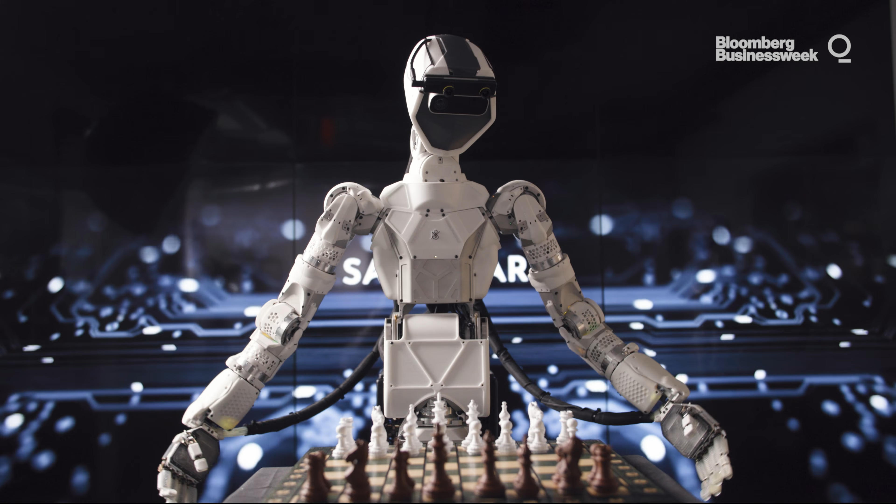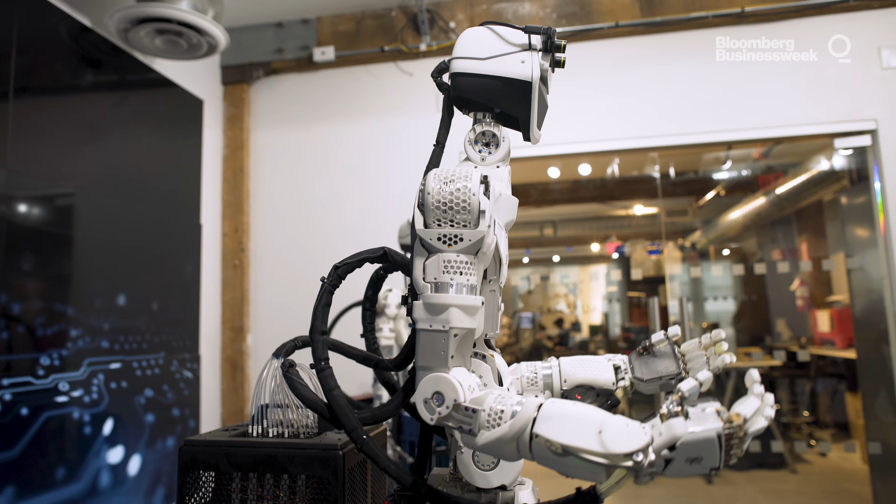But today, I will visit a startup called Sanctuary AI. They've built this crazy robot that has artificial intelligence baked into it, and it also has these very lifelike hands. Sanctuary claims to have the smartest, most capable android on the planet. The only thing we can say for certain is that because the robot is being built in Canada, it will be ridiculously polite. I'm sorry. Excuse me. My bad.

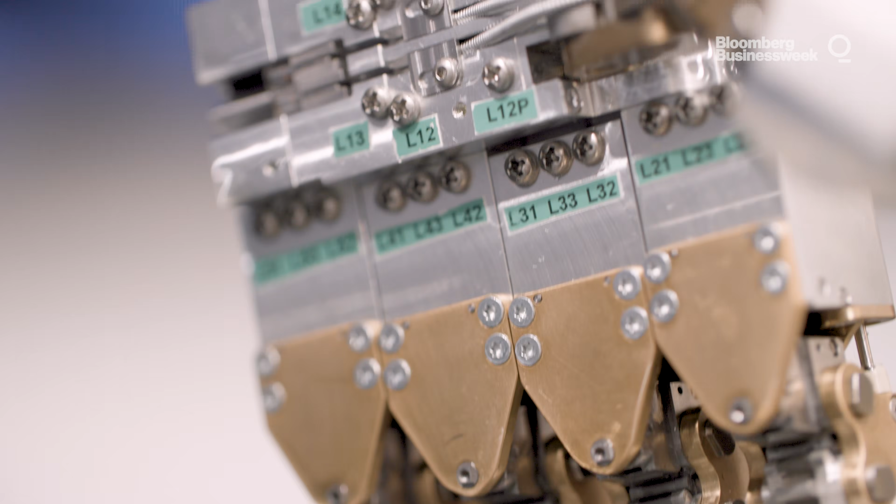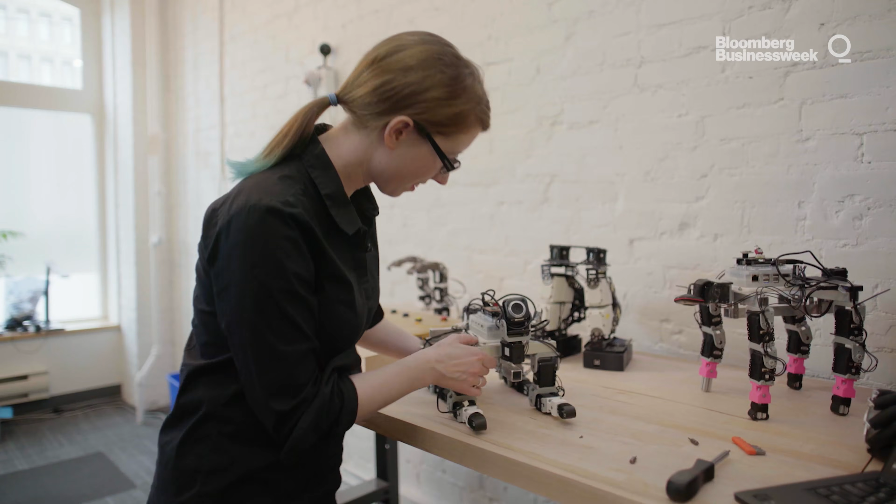Sanctuary AI was started by a handful of engineers in 2018. The company's CEO is this fella, and its chief technology officer is Suzanne Gildert. If Suzanne looks familiar to some of you, that's because she's been on Hello World before. Her previous company was called Kindred, and it made robotic arms that could pick and place items in factories. Suzanne's new company is a lot like her old company, only better.

Do you want to shake hands? Yeah, absolutely. Nice to meet you. Nice to meet you.

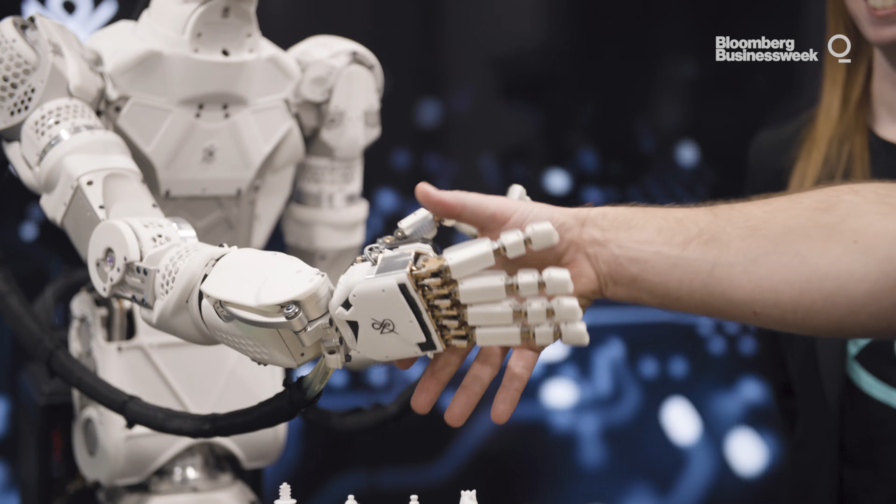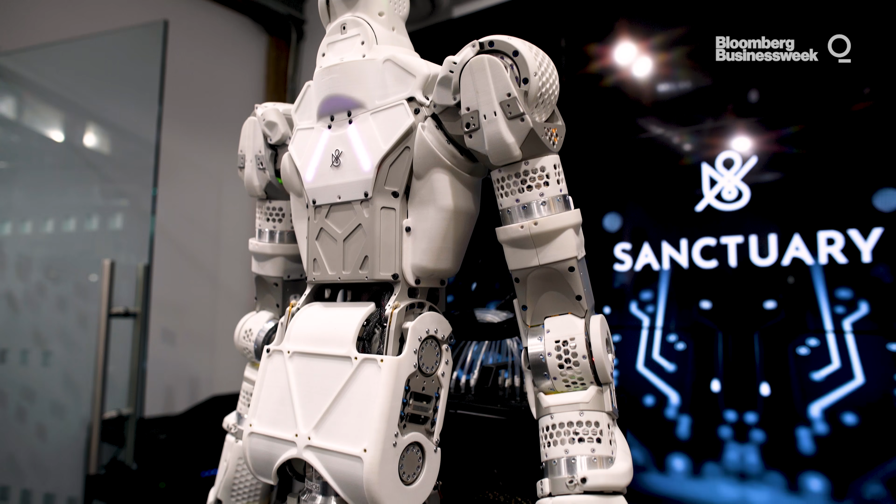So this is our general purpose robot. It's a humanoid in form and function. It's designed to be good at doing work tasks. Do I call it an it? What should we, how do we refer? I usually refer to the robot as it. Eric is our pilot, who you'll see taking control of the robot. He will be our operator today. Hi, Eric. Hey.

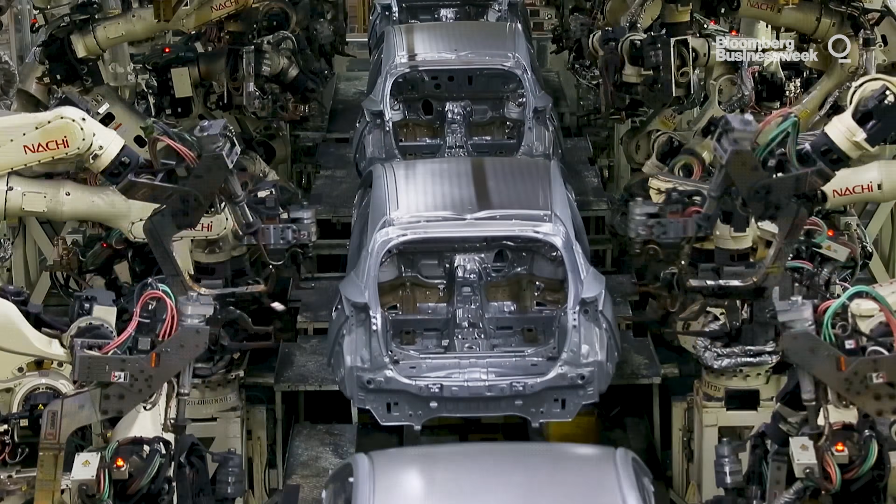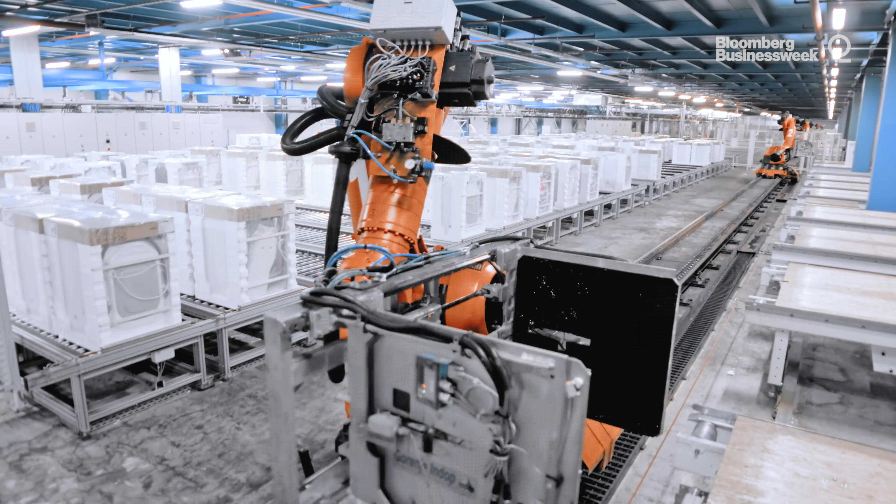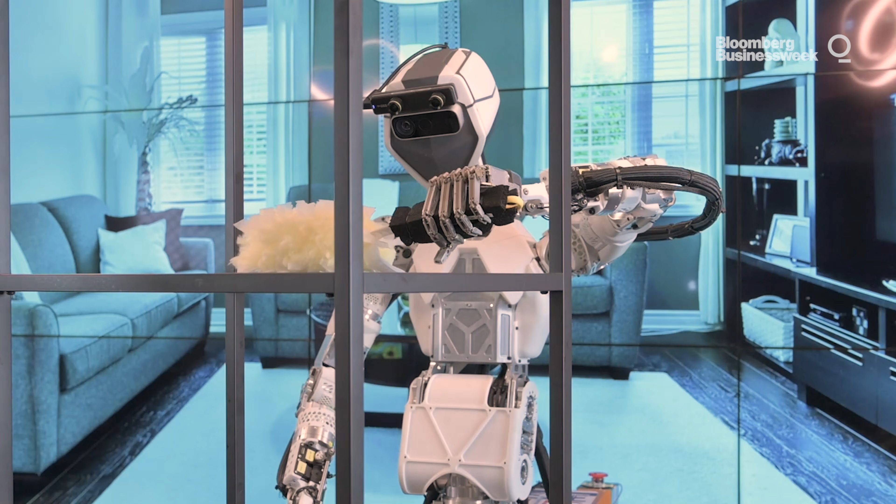I think people have seen robots at a car factory, but walk us through some of the advances you guys have made versus that type of machine. Most robots that you'll find in industry are special purpose, and they're programmed in a very different way. They're programmed to do a repetitive task over and over again, so that robot doesn't really know where things are. It's just executing some pre-written routines. So what we're trying to do here is build a robot that is actually aware of its surroundings. It's building up a mental model of everything it's seeing in real time, and is therefore able to do more general purpose tasks.

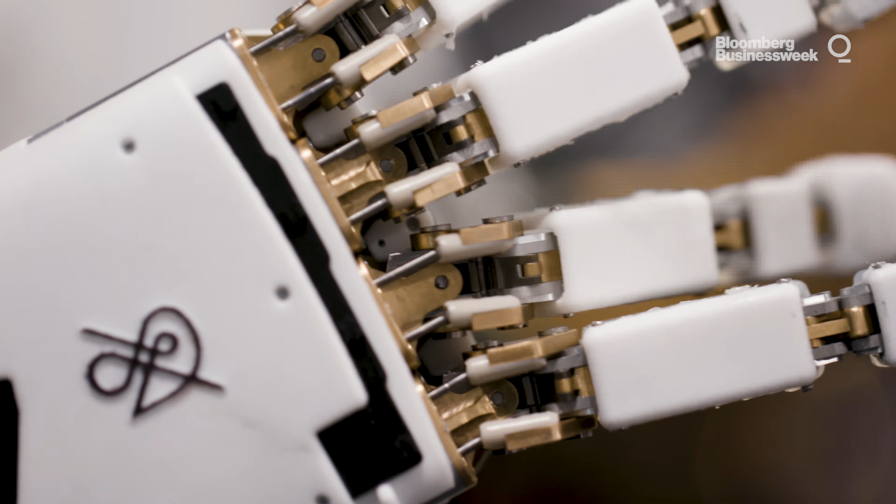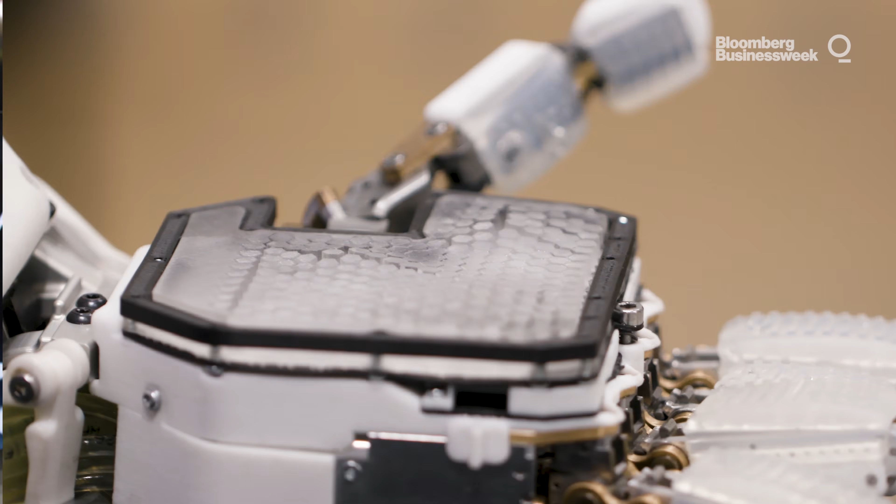A big part of that would be the dexterity of the hands. I know you guys have been focusing on that for quite some time. Yeah, these are about the 4th generation hands that we built. So maybe Eric, you can hold out your hand. I can show some of the features. So obviously a human-like hand, 4 fingers and a thumb. These things you see here are sensors. That gives the robot a haptic sense of touch.

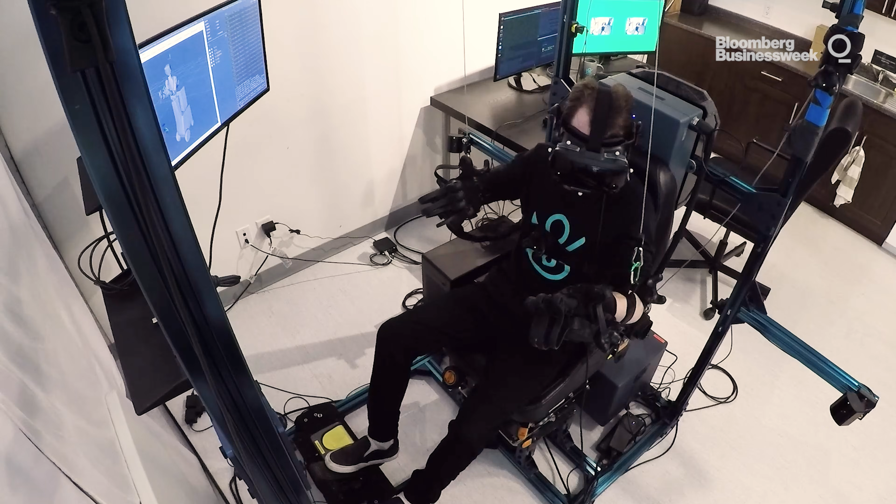When these pressure sensors are pressed, the data signals go into the software system, and they're also relayed to the pilot. So Eric has like a glove on, and he can feel that when you poked. Yeah. Why don't we play a game of chess and we can talk through some of the components while we do that?

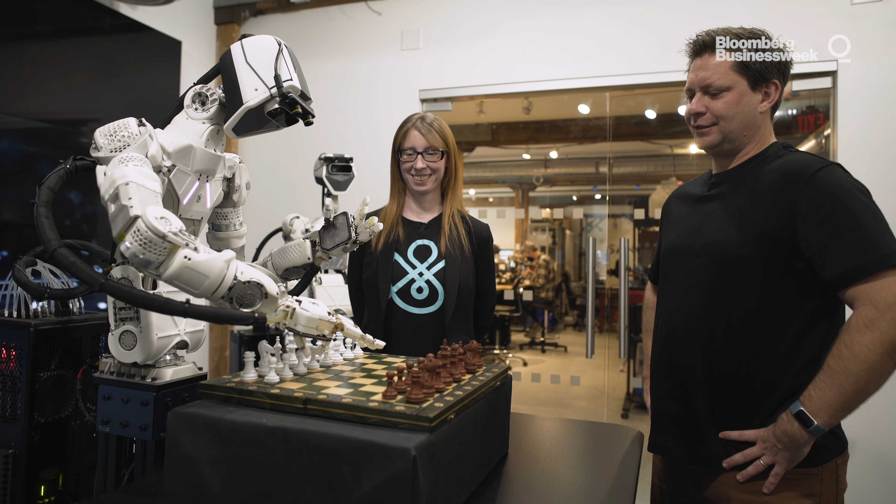All right, so you're white. You go first, right? Yeah, sounds good. Should have pre-planned my move. I will be using the Sicilian defense. I'll let you know. Oh, seems I might be outmatched.

Eric, when you're doing this, are you just seeing the piece like I am, or is there some sort of guide? Do you have a helmet on? Yes, I do. I have a VR headset, so what I'm seeing is stereo vision through the camera you're looking at. Yeah, you can almost see behind you, right? Yeah. Oh, I didn't even see the camera over here.

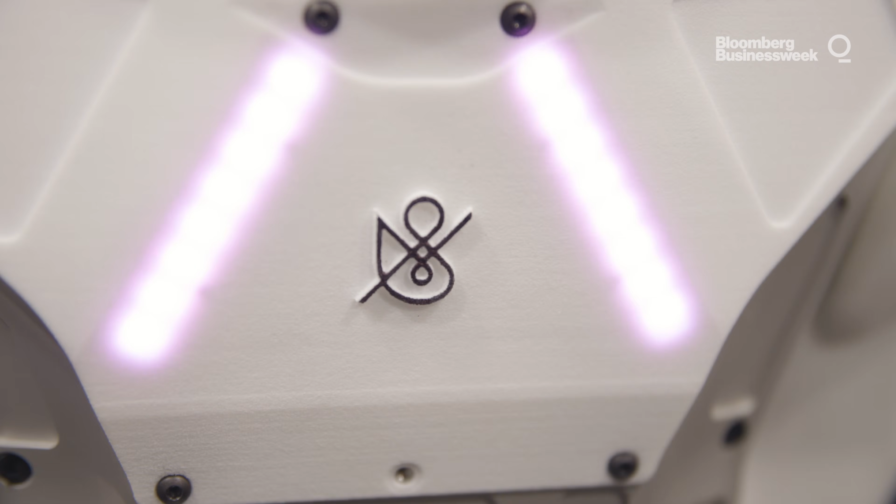I think that probably if people saw this for the first time and then they hear that there's a human operator behind it, they would kind of be like, oh, well, that's not what I wanted, the full robot. So a lot of people ask, well, isn't this just a person behind the scenes?

But having a person behind the scenes allows us to gather lots of very human-like training data to train the software system, train the AI algorithms to be more human-like over time.

So we're currently just using VR rigs, off-the-shelf gear, but we're planning on having some new rigs made that actually give force feedback to the pilot as well. So Eric, if you hold your arm out, the pilot would actually be able to feel the force feedback as well.

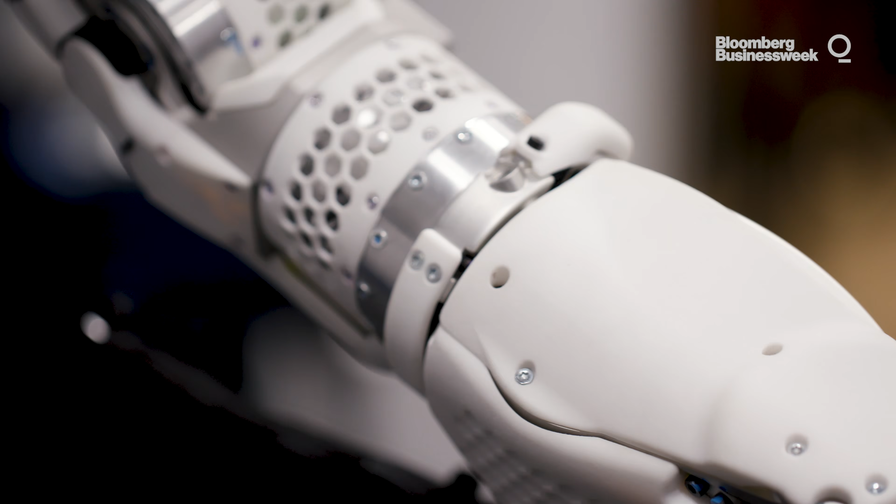These robots are designed to work alongside people, so we need them to be very safe. One of the things about this robot and its motor system is it actually operates in a force-controlled mode. So what that means is the robot will try and hold at the position of the arm, but if a maximum force is applied that is greater than a certain force, it will give.

Tell me a little bit about your background, just because I know you've been into electronics and computing since you were a kid, right? Well, I've loved electronics and robotics and things like that since I was little. I did a degree in physics and a PhD in physics and electronics too. And then from there, I worked in the quantum computing space for a while and eventually found my way into AI.

I know, outside of this, you have all these interesting tech-related pursuits. Yeah, so I have quite a lot of interesting hobbies that I do. I do like to do paintings. They've kind of moved towards a more tech electronics theme, and they're actually inspired a lot by computer history. So a lot of the paintings you'll see are things like close-ups of old microprocessors. There are even a few that are like robot power circuits. So always thinking about robots.

Whose move is it, Eric? I believe it's your turn. I'm not going to lose to an AI. Team human. Okay, I'm okay with that strategy.

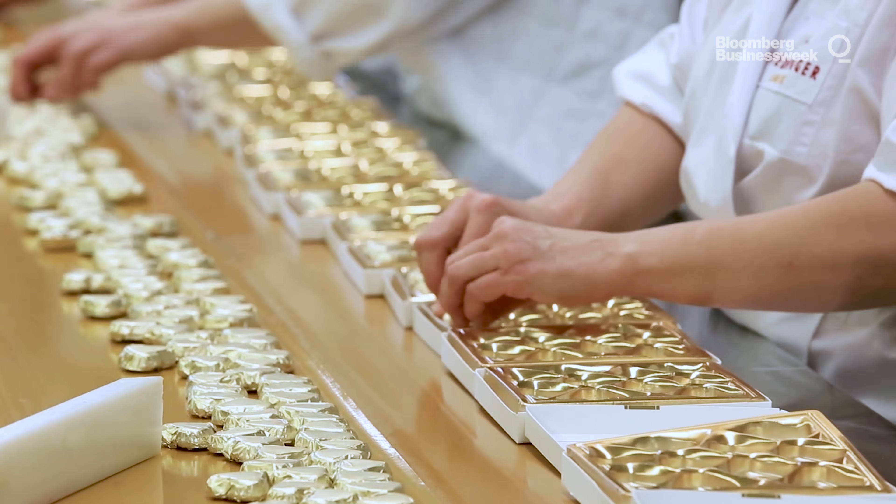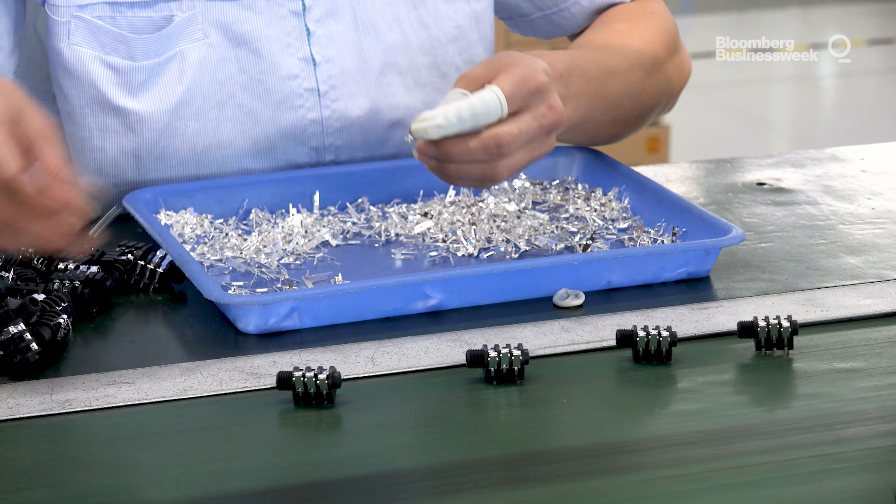But also chess is a stand-in for all different kinds of activities that you might have to do in the world of work. Maybe things need organizing in the right locations. You need to take stock of items in a retail store. Or you could imagine instead of chess pieces, these were small parts on an assembly or a sortation line.

The goal is eventually the robot is just smart enough that it's just doing its own thing with no human operator in some jobs? Yeah, for certain tasks. So I'd like to see this robot system be able to automate the really mundane, boring parts out of the...

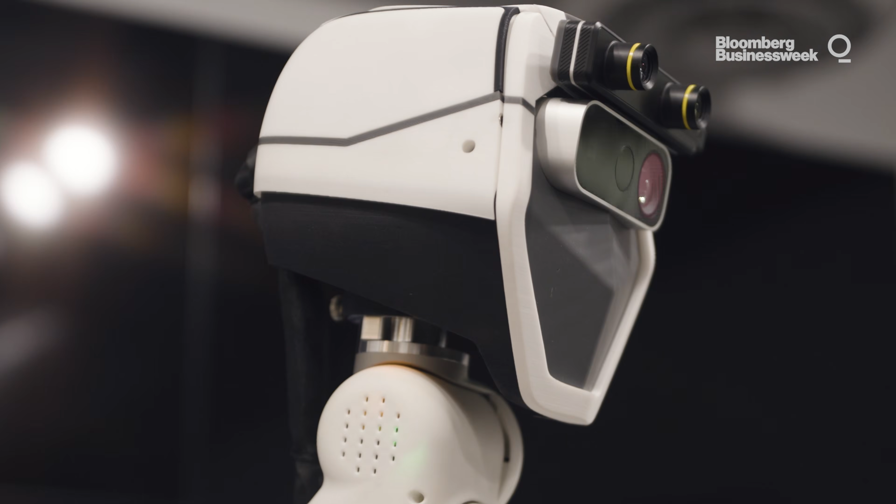Sorry, I gotta readjust something. I would appreciate if you gave me a minute or two. I'll just let him adjust that and move out of the way of its arm.

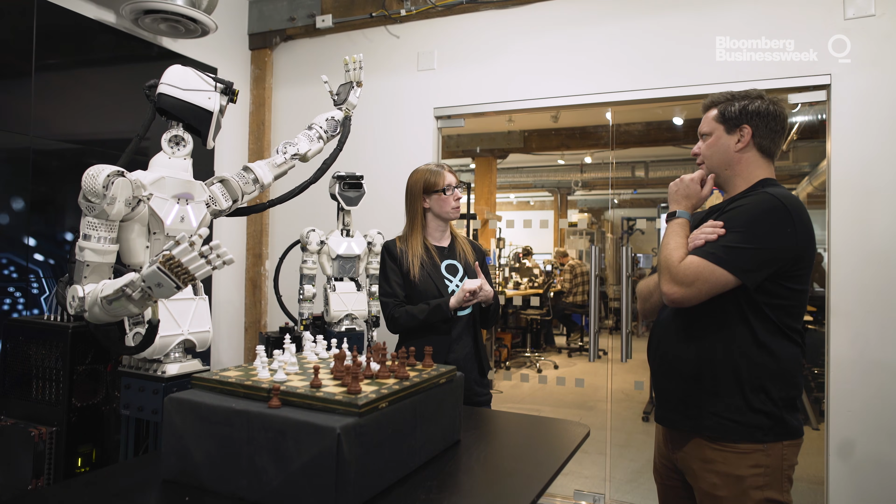So I'd like to see these robots doing the sort of boring, mundane parts of tasks, and then the pilots are now freed up to be more like the overseers or the managers of a group of robots. So you can imagine a group of robots all being controlled by a single pilot, almost like the person becomes more of a manager, and the robots become more like the manual workers.

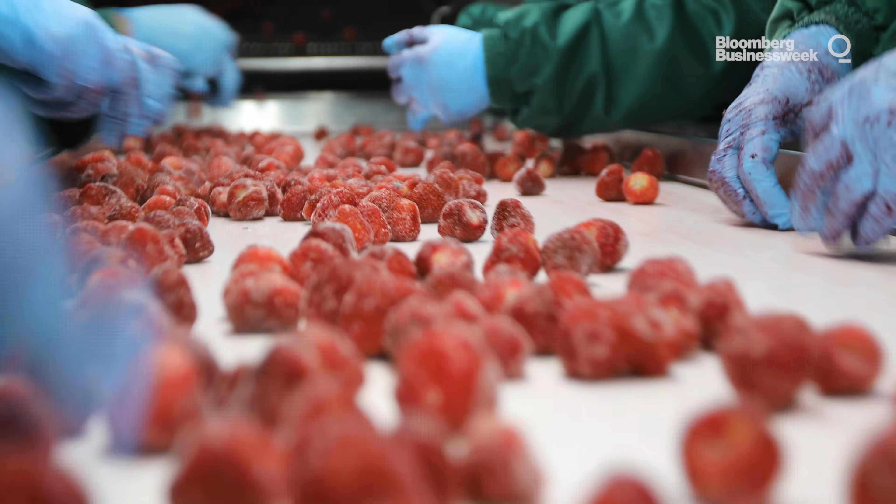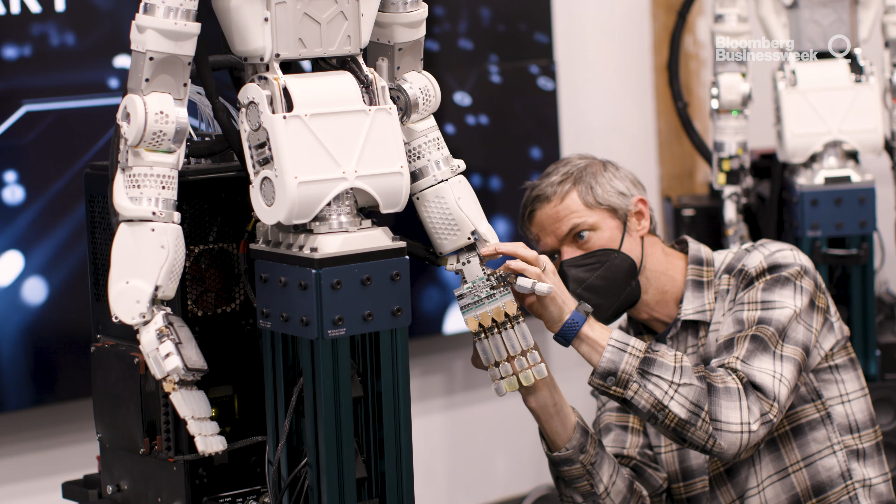So about 95% of all jobs, the dexterity of the fingers precludes conventional robotic systems from doing them. So we have attempted to build the world's best robotic hands because hands are really important for work. So we are working on integrating state-of-the-art robots, specifically for manipulation of the world through hands, with a new kind of AI system that integrates a lot of the tools that people have been developing around the world into a platform that's intended to give these robots the kind of understanding of the world that is kind of a baseline for work.

It's interesting because I think there's definitely people who'd look at what you guys are making and they're like, oh, great, now you're going to take all these factory jobs from people. Well, it's not taking jobs. In fact, I think that it's starting to be recognized that the problem that we face in terms of the employment labor market is actually the opposite problem. There aren't enough people to do the kinds of work that needs to get done to support the continued flourishing of civilization, our way of life.

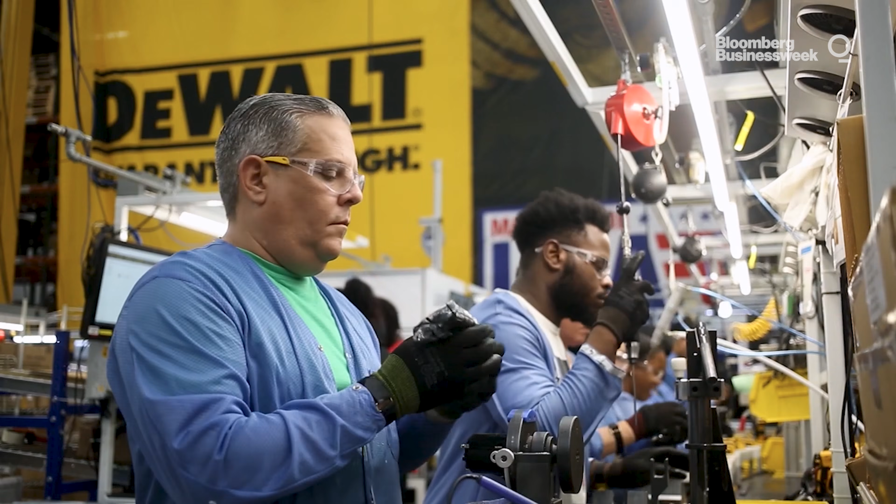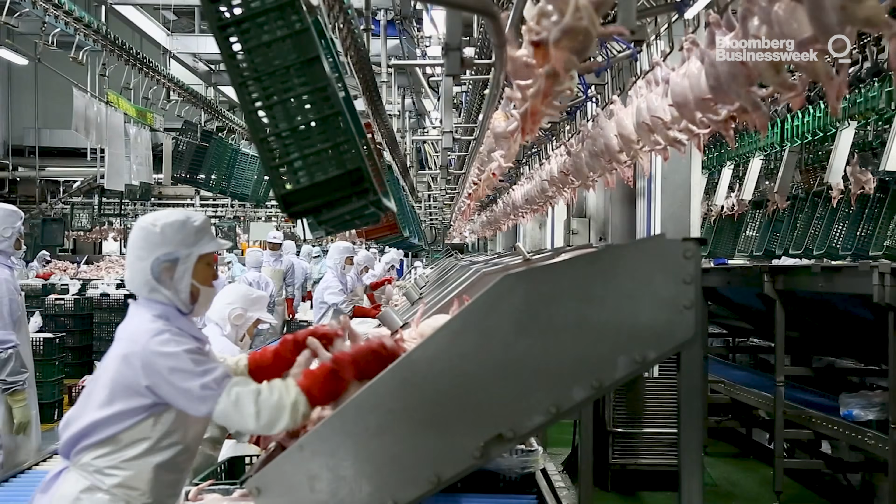There are more than 11 million unfilled positions in the US right now. The world needs more workers, especially in the kinds of jobs that people typically don't want to do - those 11 million open jobs right now. Those are the kinds of things that we're going to target. And that's a big number. 11 million jobs, it's only going to grow over time.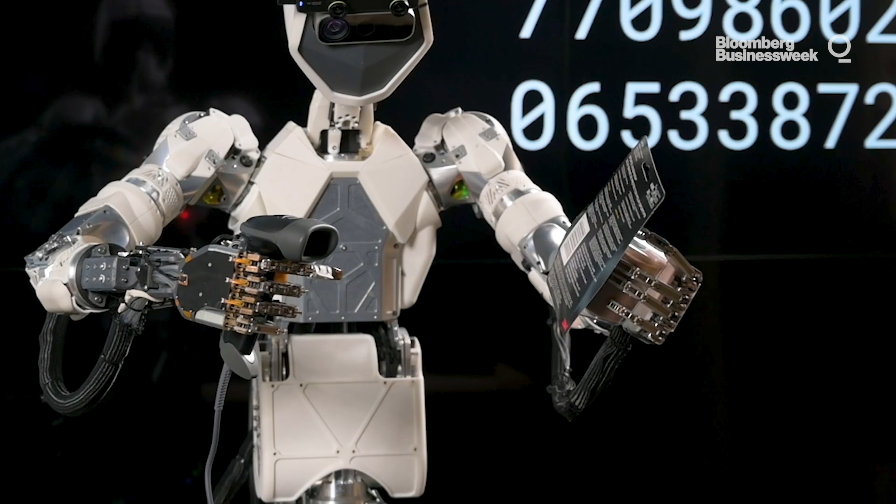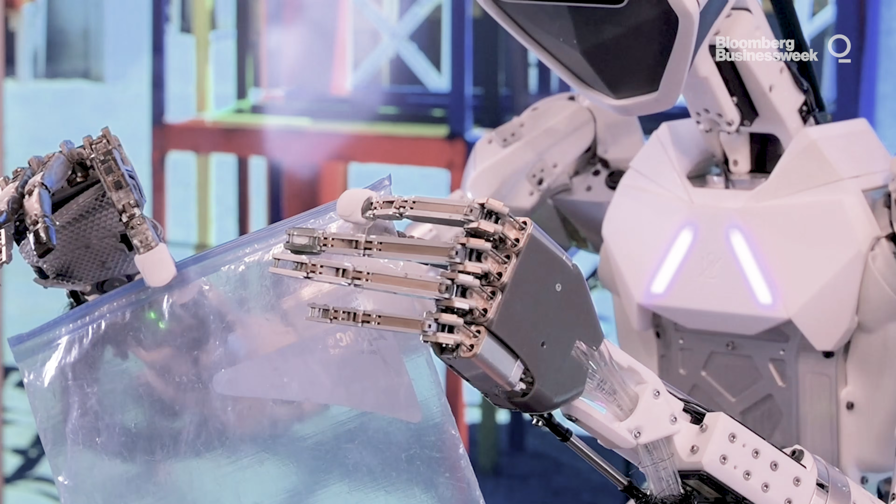Birth rates are plummeting, and 11 million robots of our sort in the world doing those jobs doesn't take a single job away from anyone. But 11 million robots out in the world is an enormous business. It's starting to become at the scale of the automotive industry. And I do believe that this is the birth of a new industry. It sort of looks like robotics, and it sort of looks like AI, but it's a new thing. And it's going to rival the biggest industries there are today in importance and scale when it gets going.

Okay, so you're moving in on me, quick, distracting me with your fancy hands. I'm going to deal with your knight because it's really bothering me. Ah, my knight. Yeah, he's a troublemaker. What did you get up to this weekend? You know, just robot stuff. A lot of chess, I was practicing for you. I know you're pretty good. Ooh, I don't like that. I will take this, put it over here. Not cool, not cool. Oh yeah, you don't miss a beat, man. All right, I will concede. I can see you've got me beat. Very good game, well played. Thank you, sir, thank you.

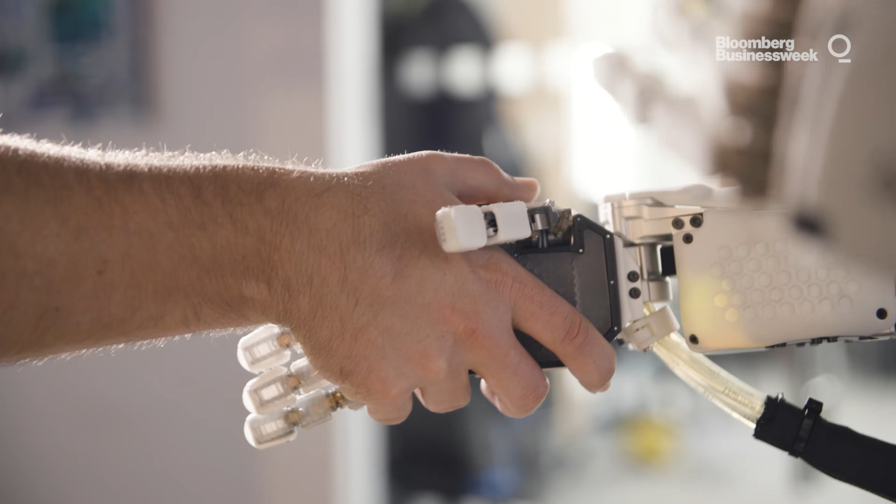So we saw Eric as the pilot picking up the chess pieces quite easily using his human mind. And here the robot is trying to learn what it means to actually pick up a chess piece in the same way that a human would. And it does it by trying over and over and over again.

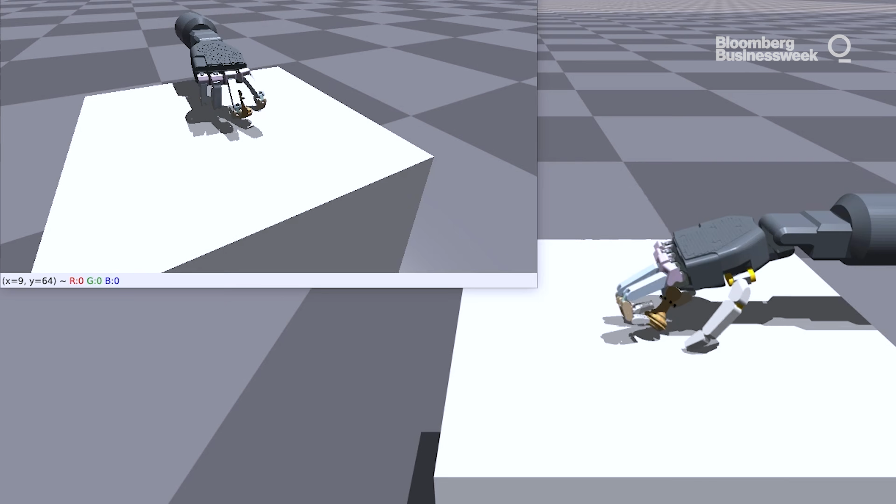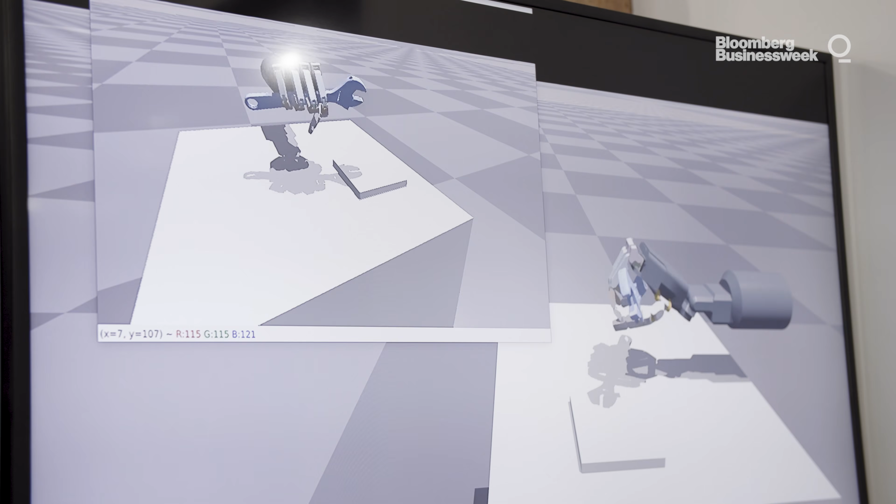So on this screen over here, you can see a close-up of it trying to grab a chess piece, and you'll see it sort of fumbles around a little bit at the start. But after enough training episodes, it will learn to grab it in a very human-like way. There's not, obviously, 10,000 robot arms doing it - this is all simulated. So here we can have thousands or hundreds of thousands of hands trying to pick things up faster than real time. So you're accelerating the learning rate by millions of times.

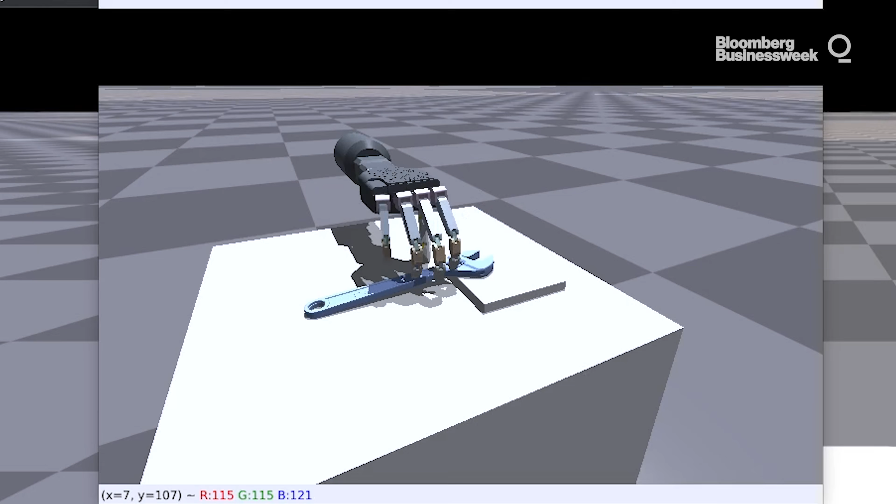So the physics engine, the rules that have been put into the software to mimic things like gravity and the different properties of our world, are good enough that this is actually training the hand. Yeah, they're getting there. If you think about where you could have done this a few years ago, you might think, oh, I could use a game engine, because game engines are pretty good simulated worlds. But when you get deep into game engines, you find they're sort of optimized to make games look good - they have a lot of animations in them, they don't have a lot of real physics. So we're actually bootstrapping on game engine technology, but there are now systems going beyond that and trying to mimic physics very well. So even something like the interaction of the end of a fingertip with an object has to be modeled very well - you need a really good physics engine.

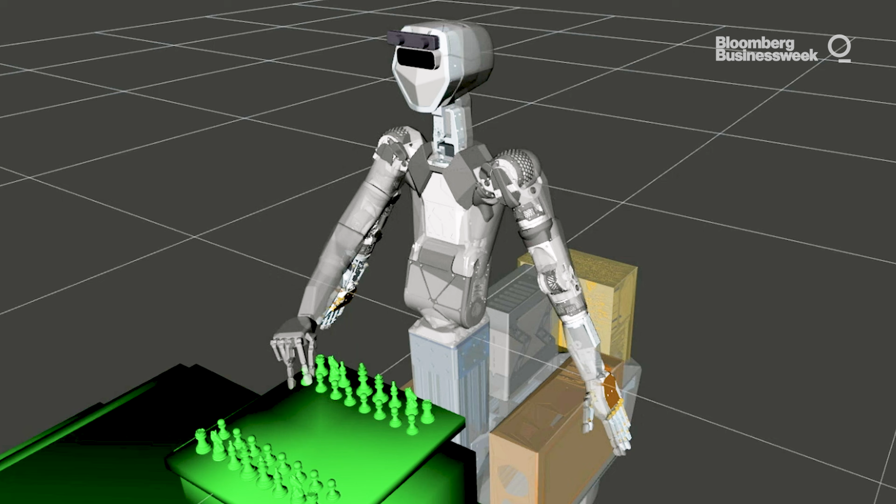What do we have here? Yeah, so we saw the grasping algorithm being trained. What we're actually seeing here are those grasps being realized - it's taking what it's learned and putting it into practice. So it's motion planning, not just the grasp anymore, but that in combination with the entire movement of the robot body.

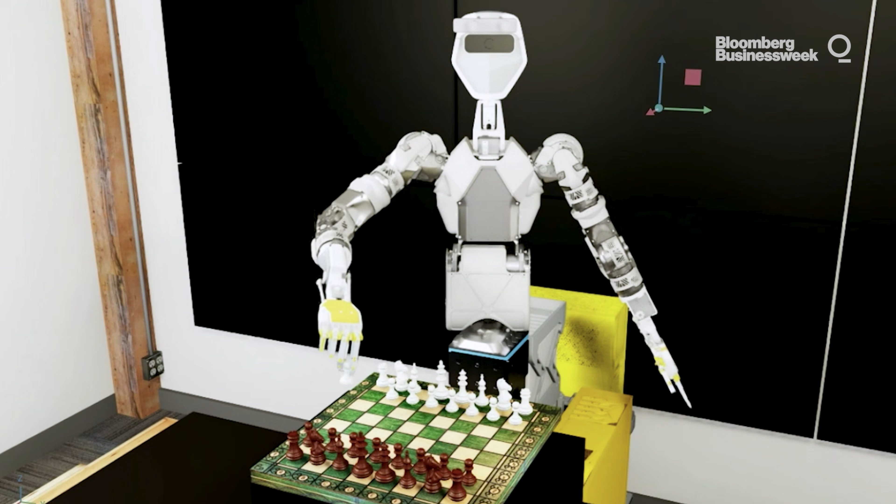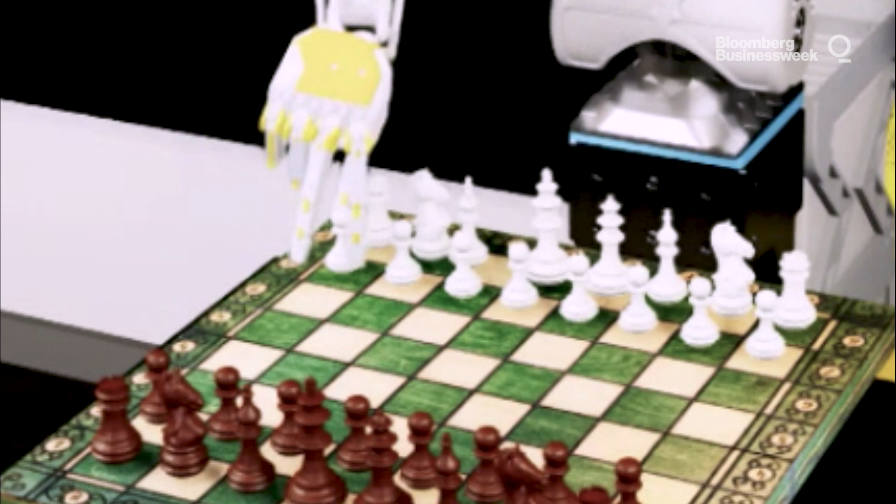Your eyes kind of lit up when you were talking about this. Why? Yeah, so when you just look at this from the outside, it's like, oh, a virtual robot is moving a chess piece, so what? But to me, this is like a spark of life moment, because what you're actually seeing is fully autonomous grasping and manipulation of an object in a scene where none of this is pre-programmed or specified. It's figuring out where those pieces are just by looking at the scene. You can see in this view, it's actually trying different potential grasps, and then it's actually executing the move using real physics.

Okay, you've got this virtual robot getting more sophisticated and doing these things, but in my head I feel like the second you have the real robot, there's going to be all these differences in the chess piece and the physics between the hand and the pieces. There is still some discrepancies between reality and the simulation, but that gap is closing all the time. And to me, this could transfer and generalize to other types of objects, other scenarios. So rather than just thinking about a chess game, think about cutlery being laid out in a restaurant or something like that.

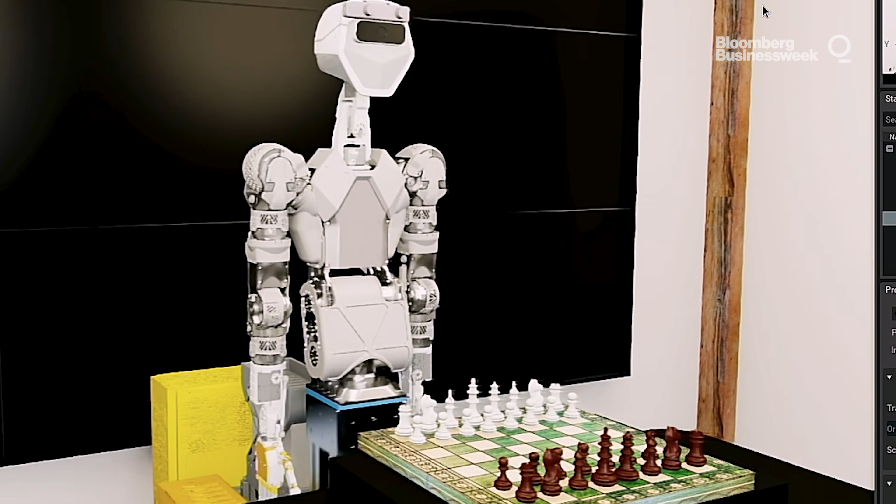So what we're seeing now is a little peek inside the AI mind when it's running. If you remember earlier, we saw the VR type of piloting. Imagine now, instead of having to control the robot with all this VR gear, you just have a drop-down list of options. So you can see there are two screens here.

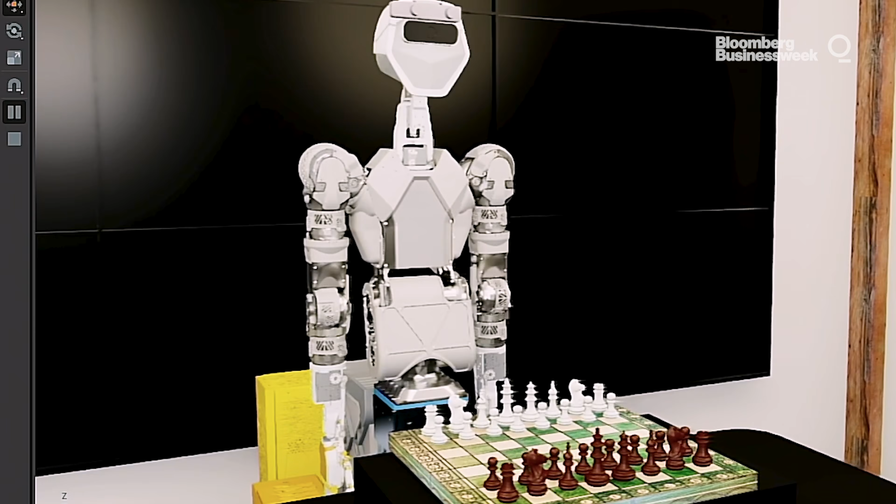This one we call the outer world model. So this is a digital twin of reality, a simulation of the world, and it's a simulated robot. This one down here is the robot's mental model of the world. So this is inside its mind, and this is outside its mind. You'll see the main difference between these two at the moment - it's pretty obvious. There is a chessboard with the pieces here, and it's not here. The reason is that the robot is not looking at the chessboard, and it's never seen it before, so it doesn't have a mental model of the chessboard.

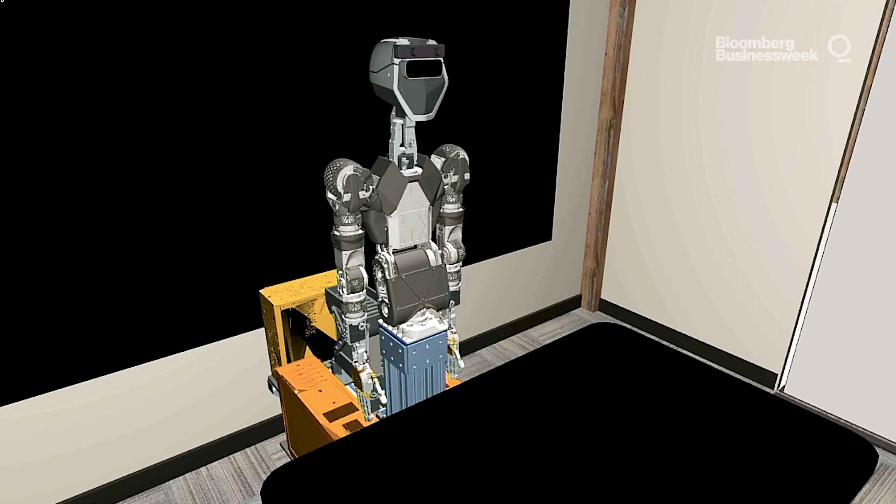But say I'm now a pilot here, I can use the command 'look down' here. We're now controlling the simulated robot, look down, and now you can see the chessboard appeared here. So now it's building up this inner mental picture of what's going on in real time. What's interesting is they're all jostling around a little bit, and the reason is that these are all being detected and figured out what they are in real time.

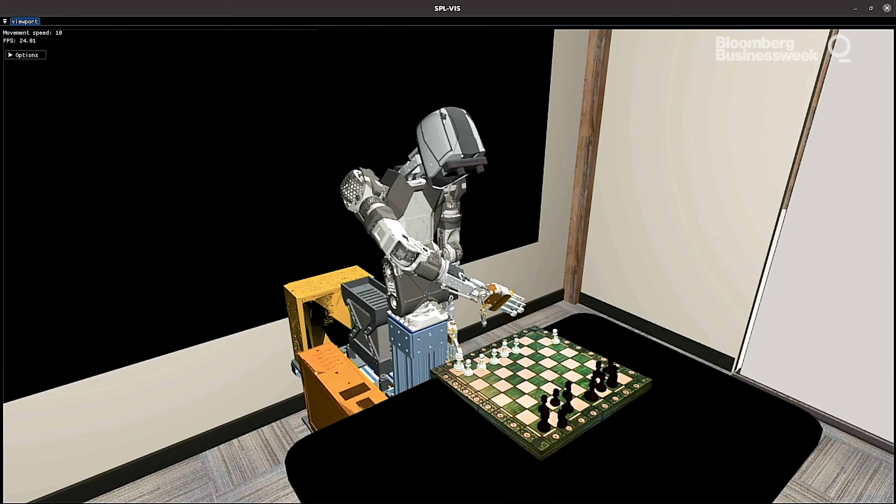So this is super interesting what happened. Down here, a bunch of the pieces have disappeared. Is it like blocking its vision? Yeah, see, the hand is in front of the pieces. It's like a 6-month-old baby - if you show it something and then hide it, like peekaboo, it thinks it's gone. That's a very human-like trait of a developing mind, going through this stage where if you can't see it, it doesn't exist. So what we really want to get to here is that this robot in any real-world scenario would roll into a room, look around, and start building a mental model of everything it was seeing in real time, including the room and all the objects and what they are and where they're located.

It's funny because in some ways I'm picturing 1960s sci-fi, like an android that is moving around, and what you guys are making is still sort of in some ways people's first conception of where all this was heading. Well, I think so, yeah. And I like to think of Sanctuary's mission as going back to this sort of original vision of AI when people like Alan Turing and Marvin Minsky were thinking about how do we actually make a machine or a system that thinks and behaves like a person.

If we want systems to be able to work in the same way people do, interact with us in the same way people do, they need a human-like body and a very human-like intelligence.

Are you optimistic by nature about the dystopian stuff, or do you think it's all overblown? If we manage to develop fully autonomous AI in a general purpose robot, you might ask, what will that look like? How will it change the world? What's going to be going on?

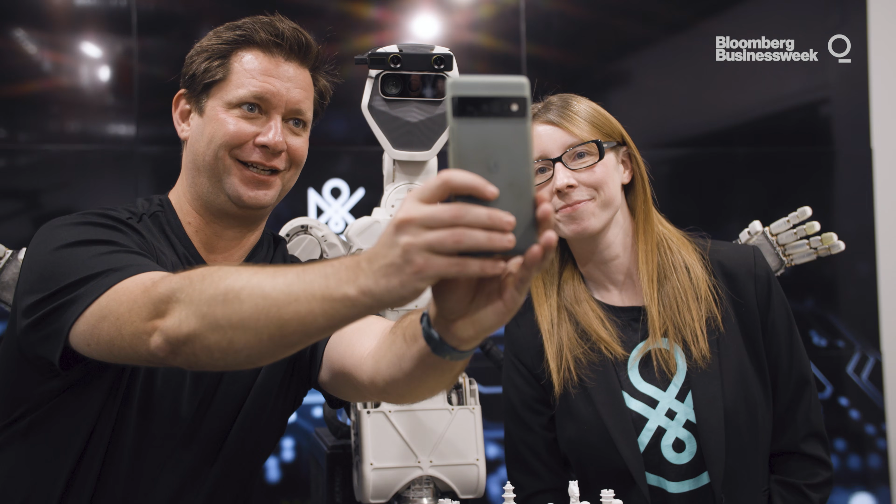I promise I'm smiling behind the camera. Do robots say cheese? Yeah, absolutely. All right, 1, 2, 3. Cheese. Cheese.